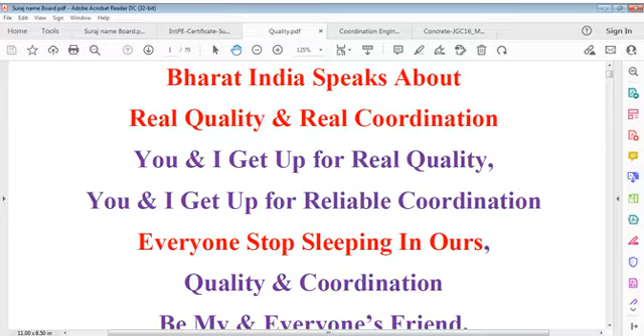It's unfortunate, and not only in ours, I see other countries do the same. There is no major difference, but there is no hunger for quality anywhere. Quality is not made an aim, an objective. It should be made an aim, an objective. I don't know the reason why it's like that, but it happens.

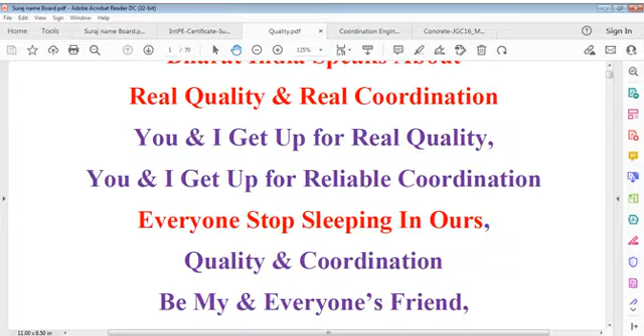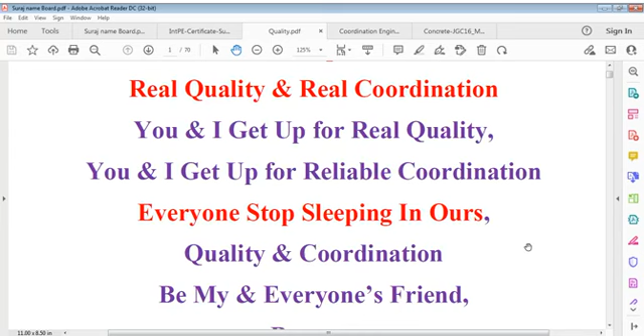When I say quality, I mean the real quality, not just papers, not just statements. Production, manufacturing, construction, all should have quality systems and inbuilt quality. We cannot simply say we got quality only using certain documents. No, the product must give quality, whatever kind of product it may be.

It may be some object, service, governance, management, production, product delivery, maintenance, or individual life. Whatever is least expected, at least that should be given. But unfortunately it doesn't happen. We sleep, and particularly in this modern world full of digitization and money power, people have left behind quality. In fact, quality has not only been left behind, it has been disappearing.

Now I am 68 years old. If I compare my time when I started my career in 1975, and particularly in 1981 when I joined overseas jobs in the Middle East and Gulf, and compare the engineering works I did in Bharat, India with those I did in Iraq or the Gulf, I could actually learn there the practical aspects of engineering construction and engineering itself.

I could learn a lot about quality, though there was no system as such in those days. Quality systems did not exist. No computers existed, only calculators. I think that was a good lesson for engineers and generations like me, when we had to do everything manually from scratch to finishing. Every item was done manually, and that was the greatness of the profession, to learn practically. Time changed, quality lifted itself. But computers entered earlier than quality, that's a fact.

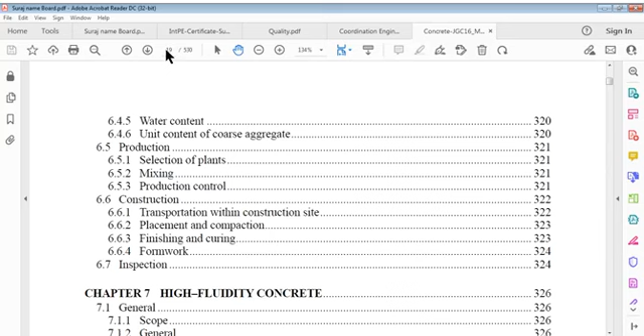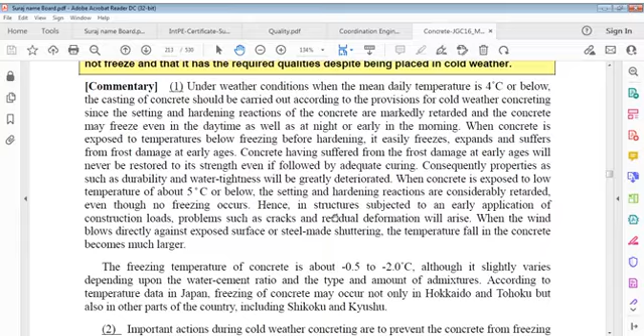It takes time, we have to think on others and on everything like that. Only then we can say we can do something like that. That is a very important point. And just like I'm showing a file of concrete, which is very significant. And we have many references because specifications mean quality itself. The specifications mean quality itself, and we can't say otherwise.

And therefore, I am talking in parallel to concrete because concrete is such a material which is used in abundance in the construction world. Whatever construction we do, whatever development works we carry out, concrete is associated everywhere. Even if you install a machine, you require a certain plinth for the machine, you require a certain foundation.

For major machines, for example a major compressor machine, you have to install it on some plinth, a very big one, or to install some equipment you require some foundation, and that foundation is generally concrete. For buildings, foundations are concrete, structures are concrete. Of course, even if it is structural steel, you require a certain foundation, and that's why we say a machine may finish in 10, 20 or 30 years, but the foundation still exists. Same thing for buildings, they stay for many decades to come.

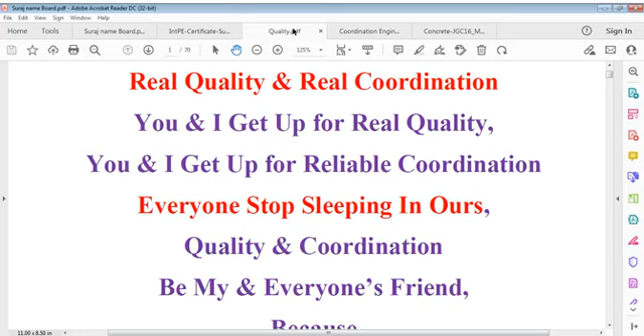We have to differentiate what level of quality we require, and it should perform when wind actions apply, when seismic actions apply, when vibrations apply; all those must be resisted by that foundation. That's the design and quality criteria, and they are considered in conjunction with coordination: engineering coordination, technical coordination, practical coordination. All those must be understood. Each plus and minus point must be known, and that's the coordination engineering I talk of.

I don't have to go further. Just for the purpose of explanation, I am saying reliable coordination. Reliable means it should be workable, it should be safe, it should suit the purpose, and it should be durable. First we say reliable means it should be safe, functional, durable, and it should give every possible result, every possible use which you expect of it, in coordination.

Coordination cannot be put in isolation, it's a part of the job. Without coordination, the job cannot be done, whatever job we do, in engineering or otherwise, even in personal life. Individual coordination is very important, and documentary coordination is very important. If you are in designs, then codal coordination and formula coordination. Likewise, in concrete, material coordination. So much is required for that. We cannot just keep it.

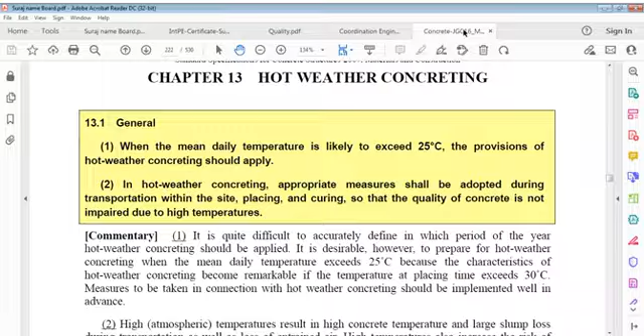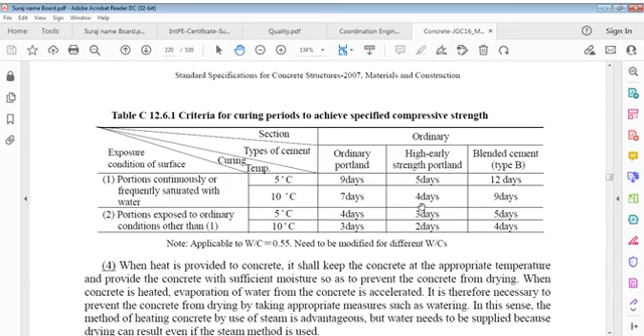We go to concrete now. For example, we are talking here of hot weather concrete. Before that, we talked of cold weather concrete, and the criteria for curing periods to achieve specified compressive strength. We talked of that, and now we are talking of formwork and shoring.

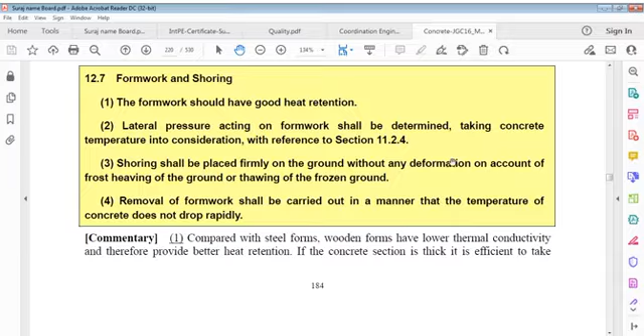Formwork and shoring, you know what formwork is? Formwork is a very simple system which gives support for the concrete to strengthen, for the concrete to set. And shoring is also required. Formwork should have good heat retention. That is the first criterion here: heat retention.

Lateral pressure acting on formwork shall be determined taking concrete temperature into consideration with reference to whatever section. Shoring shall be placed firmly on ground without any deformation on account of frost heaving of ground or thawing of frozen ground. Removal of formwork shall be carried out in a manner that temperature of concrete does not drop rapidly.

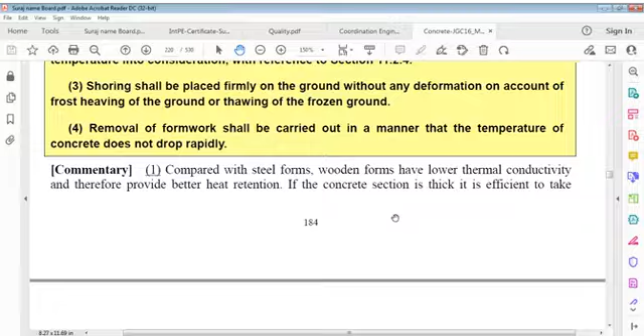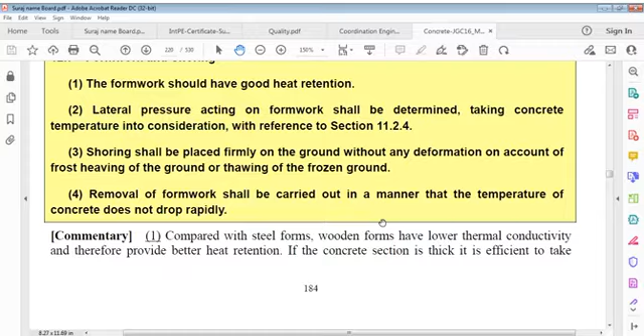So these are very important points here. It means good heat retention, lateral pressure acting on formwork, which we have to determine taking temperature into account, and also shoring be placed firmly on ground without any deformation or settlement, and removal of formwork shall be carried out in a manner the temperature of concrete does not drop rapidly.

Now compared with steel forms, wooden forms have lower thermal conductivity, and therefore provide better heat retention. Here is a comparison. Steel is a good conductor of heat, but wooden formworks are not that good a conductor. Lower thermal conductivity applies to them, and that's why we say heat retention is better in case of wooden formwork, if you use plywood or timber planks.

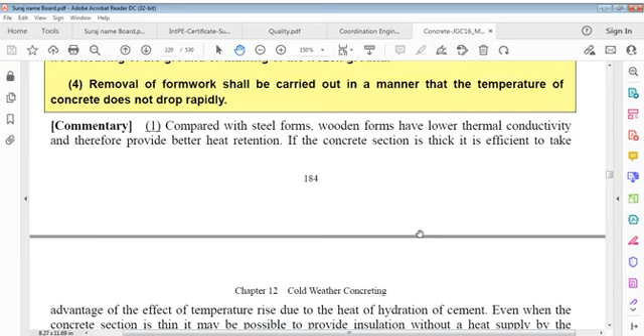If concrete section is thick, it is efficient to take advantage of effect of temperature rise due to heat of hydration of cement when volume is more. Even when concrete section is thin, it may be possible to provide insulation without heat supply by combined use of foamed resin and shuttering. When steel forms are used, it is necessary to pay sufficient attention to insulation since steel is readily influenced by rapid change in ambient air temperature.

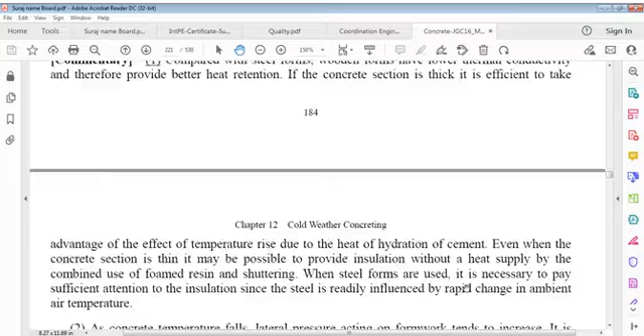This is a very technical point we have to consider in our approach here. This point is very easy to understand. Let me read it again for you so that it's clear. Compared with steel forms, wooden forms have lower thermal conductivity and therefore provide better heat retention.

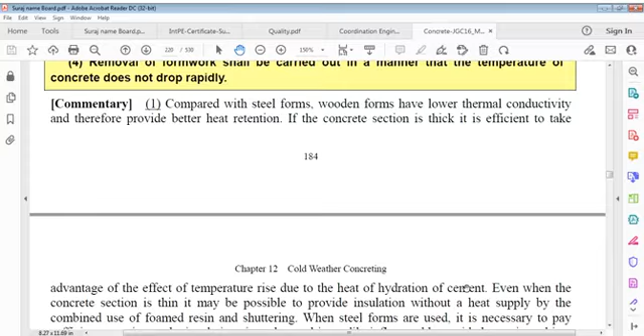If concrete section is thick, it is efficient to take advantage of effect of temperature rise due to heat of hydration of cement. Even when concrete section is thin, it may be possible to provide insulation without a heat supply by combined use of foamed resin and shuttering. When steel forms are used, it is necessary to pay sufficient attention to insulation since steel is readily influenced by rapid change in the ambient air temperature.

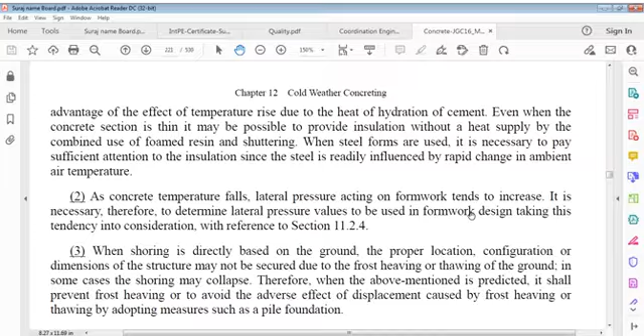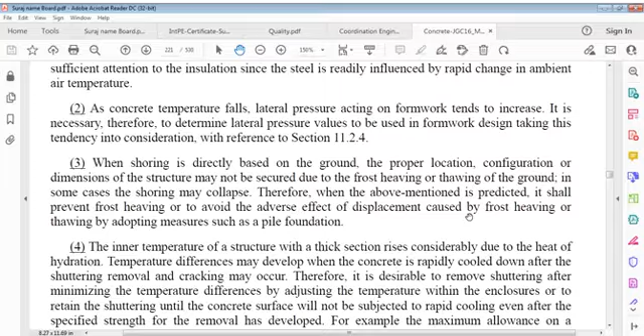As concrete temperature falls, lateral pressure acting on formwork tends to increase. If temperature falls, it means cold, so setting is delayed, and lateral pressure acting on formwork tends to increase. Reason being that when temperature is low, setting is very delayed, and lateral pressure keeps on acting. It is necessary, therefore, to determine lateral pressure values to be used in formwork design, taking this tendency into consideration.

When shoring is directly based on ground, proper location, configuration, and dimensions of structure may not be secured due to frost heaving or thawing of ground. In some cases, shoring may collapse. Therefore, when the above mentioned is predicted, it shall prevent frost heaving or avoid adverse effects of displacement caused by frost heaving or thawing by adopting measures such as pile foundation.

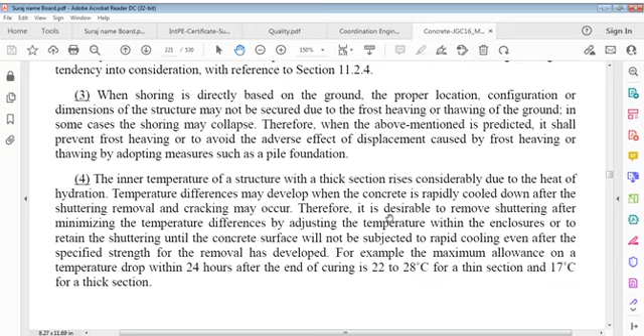Inner temperature of structure with a thick section rises considerably due to heat of hydration. Temperature differences may develop when concrete is rapidly cooled down after shuttering removal, and cracking may occur. Therefore, it's desirable to remove shuttering after minimizing temperature differences by adjusting temperature within enclosures, or to retain shuttering until concrete surface will not be subject to rapid cooling even after specified strength for removal has developed.

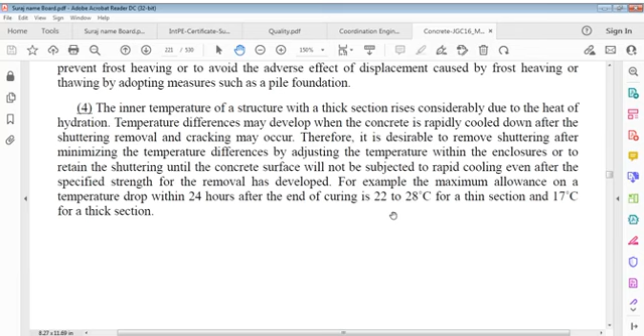For example, maximum allowance on a temperature drop within 24 hours after end of curing is 22 to 28 degrees Celsius for a thin section, 17 for a thick section.

Now we are going to talk about hot weather concrete. It was cold weather, thus in continuation it is hot weather concrete. Hot weather is a very important factor in summer, particularly where temperatures are high, particularly in Gulf countries, in our country, Bharat, India, in many parts of our country, southern parts as well as north, and also many countries where temperature is an issue during daytime as well as

night time, when mean daily temperature is likely to exceed 25 degrees. I am talking of mean daily temperature that is likely to exceed 25 degrees Celsius. Provisions of hot weather concreting should apply.

25 is not, I can say, very wonderful, but let's assume day temperature is 40 and early morning it is more than 24 or something, so it exceeds 25 degrees, even up to 30 in daytime and maybe 15 or 10 in the morning. There is a difference, but likely to exceed 25 means average daily temperature, mean daily temperature, is likely to exceed 25 degrees. We apply hot weather concreting.

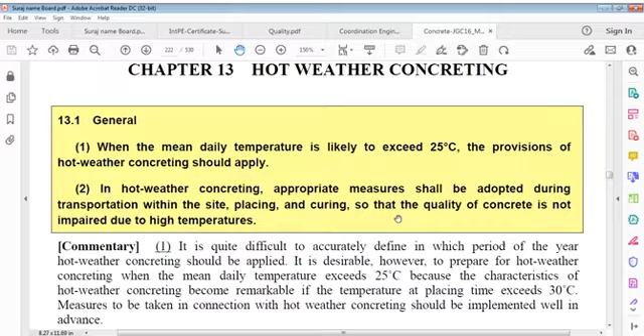In hot weather concreting, appropriate measures shall be adopted during transportation of concrete within site, placing and curing of concrete so that quality of concrete is not impaired due to high temperature. It is quite difficult to accurately define in which period of the year hot weather concreting should be applied. It is desirable, however, to prepare for hot weather concreting when mean daily temperature exceeds 25 degrees Celsius, because characteristics of hot weather concrete become remarkable if temperature at placing time exceeds 30 degrees Celsius.

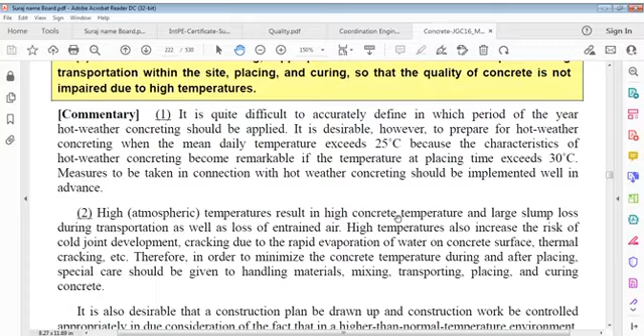We have to consider this when mean temperature exceeds 25 degrees, because characteristics of hot weather concreting become remarkable if temperature at placing time exceeds 30 degrees Celsius. Measures to be taken in connection with hot weather concreting should be implemented well in advance.

High atmospheric temperature results in high concrete temperature and large slump loss during transportation as well as loss of entrained air. High temperatures also increase risk of cold joint development, cracking due to rapid evaporation of water on concrete surface, and thermal cracking. Therefore, in order to minimize concrete temperature during and after placing, special care should be given to handling materials, mixing, transporting, placing, and curing concrete.

Therefore, in order to minimize concrete temperature during and after placing, special care should be given to handling materials, mixing materials, transporting materials, placing and curing of concrete. All this must be cared for in order to minimize concrete temperature.

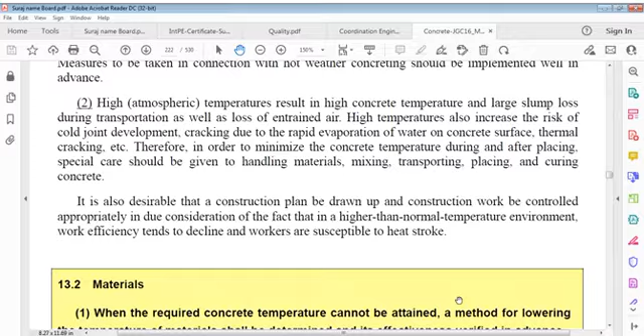It is also desirable that a construction plan be drawn up and construction work be controlled appropriately in due consideration of the fact that in a higher than normal temperature environment work efficiency tends to decline and workers are susceptible to heat stroke. We have to care about workers, we have to care about efficiency of work. And that's a very important point, that it's difficult to do concrete in hot temperature.

Again, I read, it is also desirable that a construction plan, or method statement you can say, be drawn up and construction work be controlled appropriately in due consideration of the fact that in a higher than normal temperature environment, work efficiency tends to decline and workers are susceptible to heat stroke.

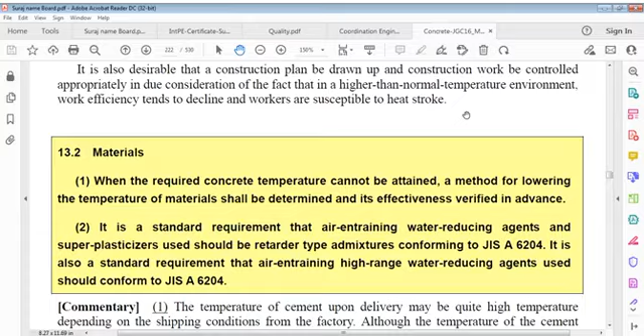Now we talk of materials. When required concrete temperature cannot be attained, a method for lowering temperature of materials shall be determined and its effectiveness verified in advance. It is a standard requirement that air entraining water reducing agents and superplasticizers used should be of retarder type and conform. It is also a standard requirement that air entraining high range water reducing agent used should conform

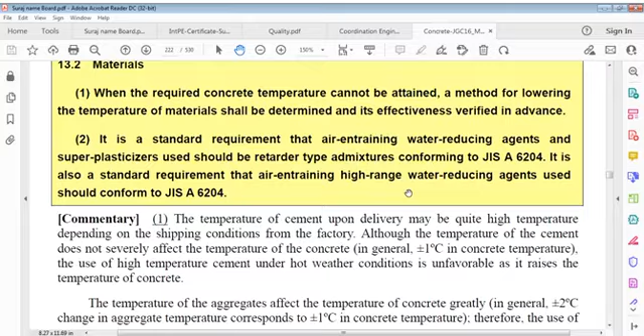to specification. Well, temperature of cement upon delivery may be quite high depending on shipping conditions from the factory. Although temperature of cement does not severely affect temperature of concrete in general, plus minus 1 degree Celsius in concrete temperature.

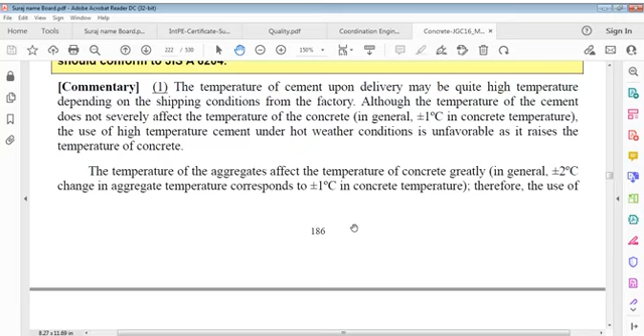Temperature of aggregates affects temperature of concrete greatly. In general, plus minus 2 degrees Celsius change in aggregate temperature corresponds to plus minus 1 degree Celsius in concrete temperature. Therefore, use of aggregates exposed to sunlight for an extended time period may produce a concrete temperature over 40 degrees Celsius. This shall cause an increase in unit water content, an increased rate of slump loss during transporting, and an increased rate of setting after concrete placement.

Thus, aggregates should be kept away from direct sunlight using adequate facilities or kept in an appropriate condition by watering them. In general, the purpose of this method of watering over coarse aggregate is to lower temperature by means of water evaporation. The method can be made even more effective by direct cooling of coarse aggregate by use of cold water. A method of lowering temperature of aggregate by use of liquid nitrogen is used in some cases.

Because of its latent hydraulic property, ground granulated blast furnace slag may consolidate in aggregate storage facilities or storage bins during periods when daily mean temperature is higher than 20 degrees Celsius, thereby making it difficult to remove from storage facilities or storage bins. During such periods, it is important to avoid long-term storage.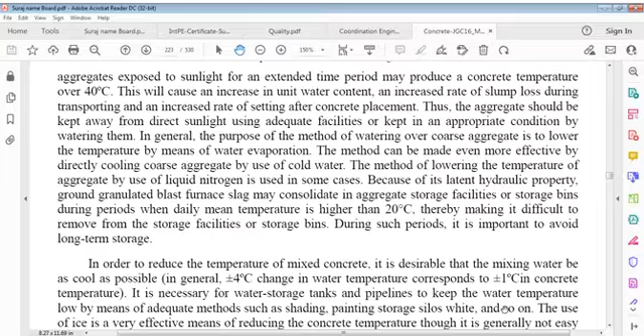So, a method of lowering temperature of aggregate by use of liquid nitrogen is used in some cases. Because of its latent hydraulic property, ground granulated blast furnace slag may consolidate in aggregate storage facilities or storage bins during periods when daily mean temperature is higher than 20 degrees Celsius, thereby making it difficult to remove from storage facilities or storage bins. During such periods, it is important to avoid long-term storage.

In order to reduce temperature of mixed concrete, it is desirable that mixing water be as cool as possible. In general, plus minus 4 degrees Celsius change in water temperature corresponds to plus minus 1 degree Celsius in concrete temperature. It is necessary for water storage tanks and pipelines to keep water temperature low by means of adequate methods such as shading, painting storage silos white, and so on.

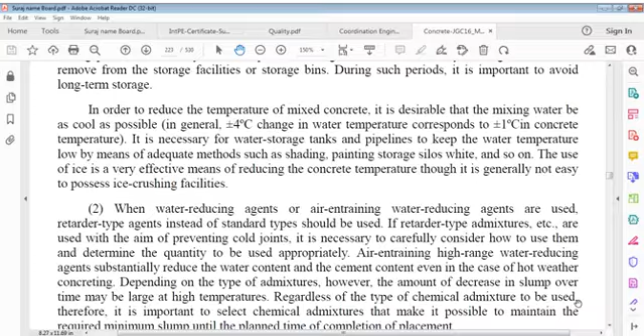Use of ice is a very effective means of reducing concrete temperature, though it is generally not easy to possess ice crushing facilities. When water reducing agents or air entraining water reducing agents are used, retarder type agents instead of standard type should be used. If retarder type admixtures are used with the aim to prevent cold joints, it is necessary to carefully consider how to use them and determine the quantity to be used appropriately.

Air entraining high range water reducing agents substantially reduce water content and cement content even in case of hot weather concreting. Depending on type of admixtures, however, the amount of decrease in slump over time may be large at high temperatures, regardless of type of chemical admixture to be used. Therefore, it is important to select chemical admixtures that make it possible to maintain the required minimum slump until the planned time of completion of placement.

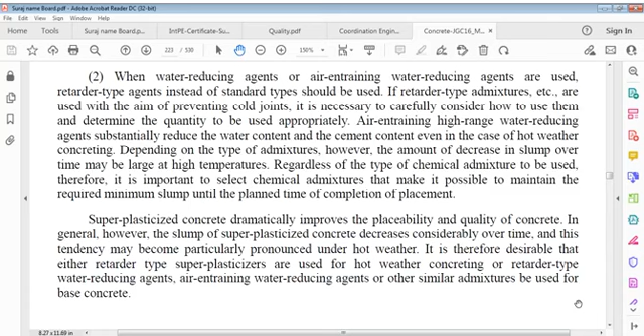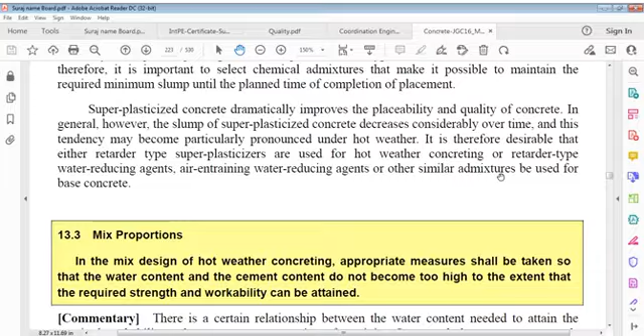Superplasticized concrete dramatically improves placeability and quality of concrete. In general, however, slump of superplasticized concrete decreases considerably over time and this tendency may become particularly pronounced under hot weather. It is therefore desirable that either retarder type superplasticizers are used for hot weather concreting or retarder type water reducing agents, air entraining water reducing agents, or other similar admixtures be used for base concrete.

In mix design of hot weather concreting, appropriate measures shall be taken so that water content and cement content do not become too high, to an extent that required strength and workability can be attained. A relationship exists between water content required to attain required workability and concrete temperature just after mixing. In general, water content tends to increase by 2 to 5% for every 10 degrees Celsius of temperature rise. In many cases, as concrete temperature rises, amount of change in slump and air content also increases.

Consequently, when slump is adjusted by using such methods as adjusting surface moisture content of aggregate without taking control measures associated with hot weather concreting, concrete with higher water content and lower compressive strength than that of low temperature seasons might be placed. When water-cement ratio is kept constant and cement content is increased according to increase in water content with aim of attaining required compressive strength, conditions that are disadvantageous in preventing cracking due to hydration of cement result.

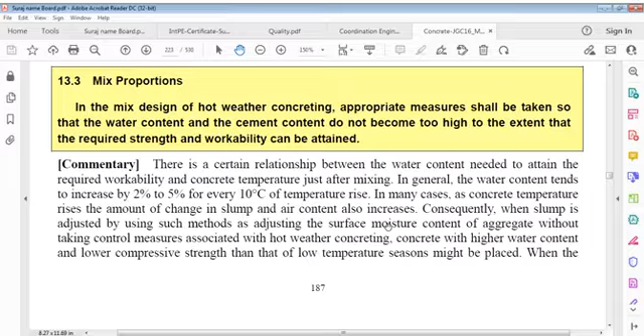It's also very interesting. Let me go back to study it further, and you may also read this mix proportions. And in this case, you can see there's a certain relationship that exists between water content required to attain required workability and concrete temperature just after mixing. In general, water content tends to increase by 2 to 5% for every 10 degrees Celsius of temperature rise.

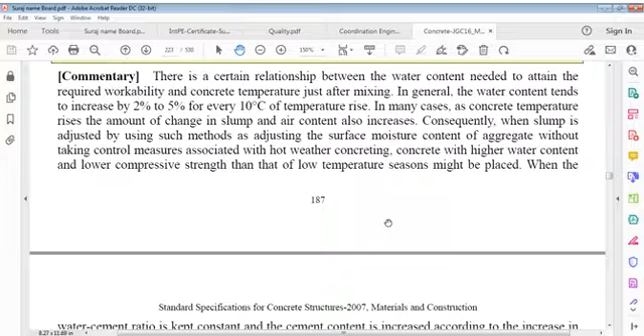In many cases, as concrete temperature rises, amount of change in slump and air content also increases. Consequently, when slump is adjusted by adjusting surface moisture content of aggregate without taking control measures associated with hot weather concreting, concrete with higher water content and lower compressive strength than that of low temperature seasons might be placed. When water-cement ratio is kept constant and cement content is increased according to increase in water content, conditions that are disadvantageous in preventing cracking due to hydration of cement result.

It is necessary, therefore, to take appropriate measures to prevent water content and cement content from becoming excessively high to the extent that required strength and workability can be obtained. To be more specific, it is necessary to determine amount of decrease in slump due to temperature rise and changes in slump over time, and check whether required minimum slump can be attained until completion of placement.

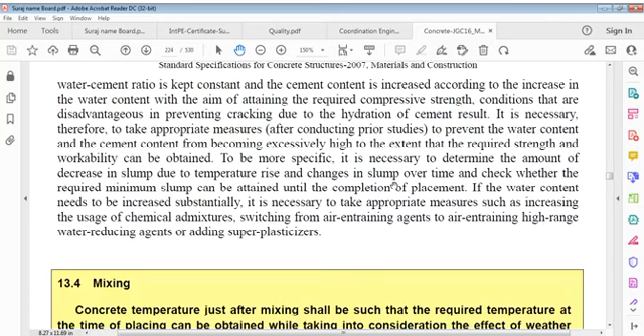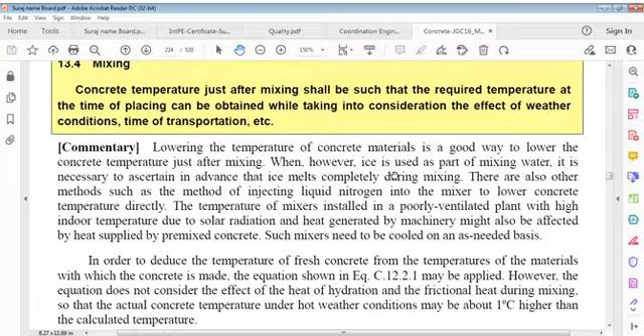If water content requires to be increased substantially, it is necessary to take measures such as increasing uses of chemical admixtures, switching from air entraining agents to air entraining high range water reducing agents, or adding superplasticizers. Concrete temperature just after mixing shall be such that required temperature at time of placing can be obtained while taking into consideration the effect of weather conditions, time of transportation, etc.

Lowering temperature of concrete materials is a good way to lower concrete temperature just after mixing. When, however, ice is used as part of mixing water, it is necessary to ascertain in advance that ice melts completely during mixing. There are also other methods such as injecting liquid nitrogen into the mixer to lower concrete temperature directly.

Temperature of mixers installed in a poorly ventilated plant with high indoor temperature due to solar radiation and heat generated by machinery might also be affected by heat supplied by pre-mixed concrete. Such mixers require to be cooled on an as-needed basis. What it says, there are also other methods such as injecting liquid nitrogen into the mixer to lower concrete temperature directly.

Temperature of mixers installed in a poorly ventilated plant with high indoor temperature due to solar radiation and heat generated by machinery might also be affected by heat supplied by premixed concrete. Such mixers require to be cooled on an as-required basis.

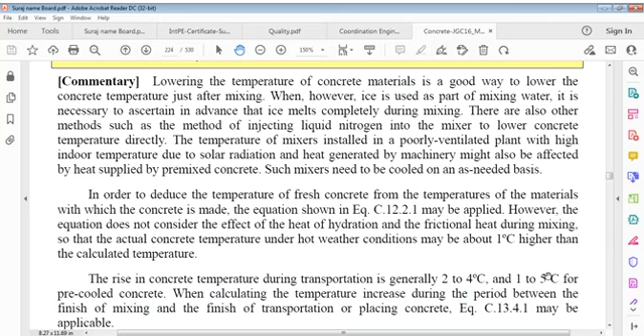In order to deduce temperature of fresh concrete from temperatures of materials with which concrete is made, the equation which we have shown here may be applied. However, the equation doesn't consider the effect of heat of hydration and frictional heat during mixing, so that actual concrete temperature under hot weather conditions may be about 1 degree higher than calculated temperature.

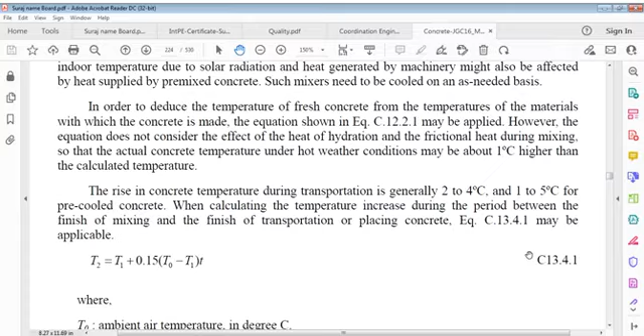Rise in concrete temperature during transportation is generally 2 to 4 degrees Celsius, and 1 to 5 degrees Celsius for pre-cooled concrete. When calculating temperature increase during the period between finish of mixing and finish of transportation and placing concrete, it may be T2 = T1 + 0.15 (T0 − T1) t. This equation we discussed yesterday also.

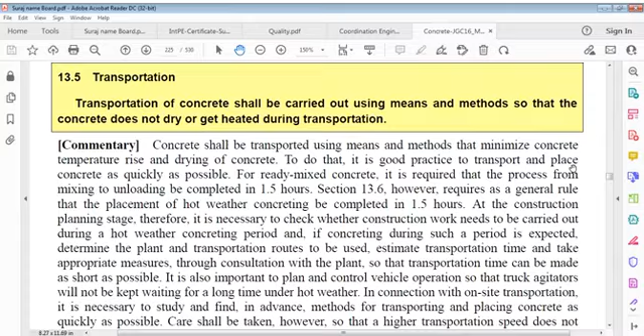Transportation of concrete shall be carried out using means and methods so that concrete does not get dry or get heated during transportation.

I'll be back in a couple of minutes. Meanwhile, you can read this because it's 5:15 and I have to be back in a couple of minutes.

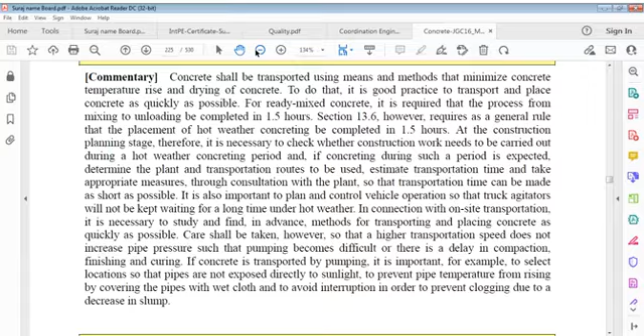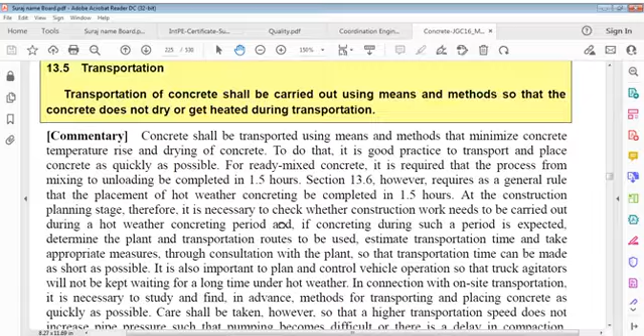Sorry, gentlemen. Now we're talking of transportation of concrete. Transportation of concrete shall be carried out using means and methods so the concrete doesn't dry or get heated during transportation. That's the important point. We don't want to heat it additionally during transportation, and that's a very important point.

Concrete shall be transported using means and methods that minimize concrete temperature rise and drying of concrete. To do that, it is good practice to transport and place concrete as quickly as possible. For ready-mix concrete, it is required that the process from mixing to unloading be completed in 1.5 hours. However, it requires as a general rule that placement of hot weather concrete be completed in 1.5 hours at construction planning stage.

That's why it's necessary to check whether concrete works require to be carried out during a hot weather concrete period, and if concreting during such a period is expected, determine plant and transportation routes to be used. Estimate transportation time and take appropriate measures through consultation with the plant so that transportation time can be made as short as possible. It's also important to plan and control vehicle operation so that truck agitators shall not keep waiting for a long time under hot weather.

In connection with on-site transportation, it is necessary to study and find in advance methods for transporting and placing concrete as quickly as possible. Care shall be taken, however, that a higher transportation speed does not increase pipe pressure such that pumping becomes difficult or there is a delay in compaction.

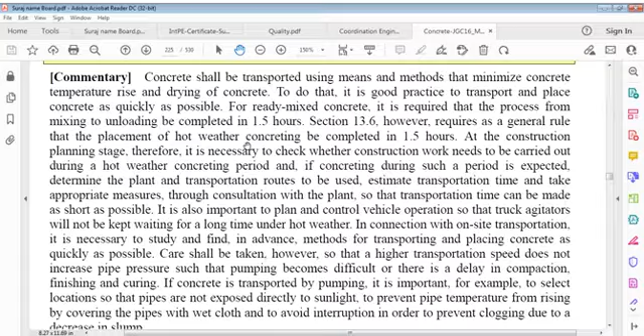That's important. It's necessary to check whether construction work requires to be carried out during a hot weather concrete period, and if concreting during such a period is expected, we have to determine plant and transportation routes, discuss with the plant person and site person, estimate transport time, and take appropriate measures through consultations with the plant so transportation time can be made as short as possible. It's important to plan and control vehicle operations so truck agitators shall not be kept waiting for long in hot weather. In connection with on-site transportation, it is necessary to study and find in advance methods for transporting and placing concrete quickly.

Care shall be taken, however, so that high transportation speed does not increase pipe pressure such that pumping becomes difficult or they cause delay in compaction. If concrete is transported by pump, it is important, for example, to select locations on site so the pipes are not exposed directly to sunlight, to prevent pipe temperature from rising by covering pipes with wet cloth, and to avoid interruption in order to prevent clogging due to slump.

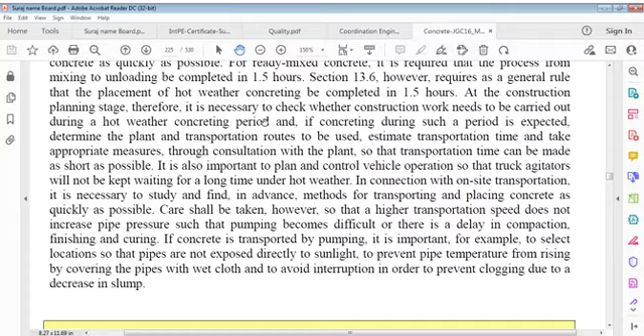Placing. In areas where water absorption is expected, such as on ground or in formwork, areas shall be saturated with water prior to placing, and we generally do it on formwork, wooden formwork.

Areas where water absorption is expected, such as on ground or formwork, shall be saturated with water prior to placing. Furthermore, when temperature of formwork or reinforcement is anticipated to rise substantially due to direct exposure to sunlight, appropriate measures such as water sprinkling or covering shall be taken. Concrete placing shall be completed as promptly as possible, and elapsed time from start of mixing to completion of placing should in general not exceed 1.5 hours.

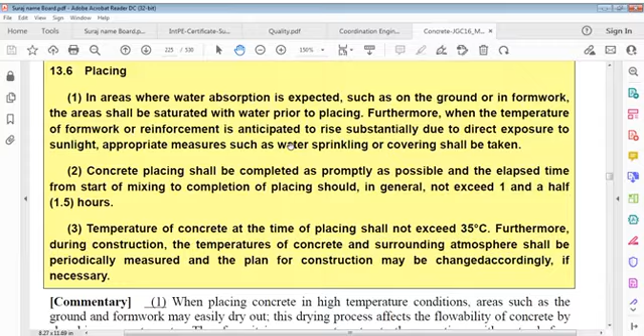Temperature of concrete at time of placing shall not exceed 35 degrees Celsius. Furthermore, during construction, temperature of concrete and surrounding atmosphere shall be periodically measured, and planned construction may be changed accordingly if necessary. When placing concrete in high temperature conditions, areas such as ground and formwork may easily dry out. This drying process affects flowability of concrete by absorbing concrete water. Therefore, it is necessary to saturate these portions with water before placing concrete.

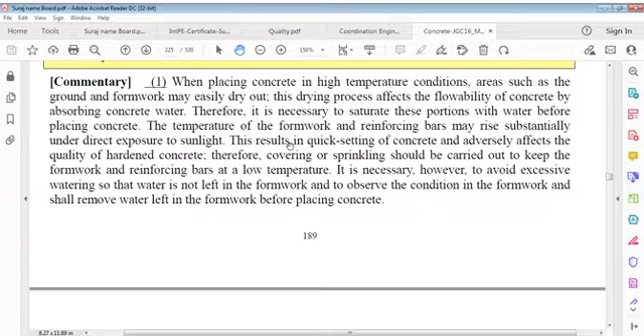Temperature of formwork and reinforcing bars may rise substantially under direct exposure to sun. This results in quick setting of concrete and adversely affects quality of hardened concrete. Therefore, covering or sprinkling should be carried out to keep formwork and reinforcing bars at low temperature. It is necessary, however, to avoid excessive watering so that water is not left in formwork, to observe conditions in formwork, and to remove water left in formwork before placing concrete.

Slump of hot weather concreting is highly susceptible to decrease over time. Consequently, concrete that has been left unplaced after being mixed may become difficult to place. If therefore construction during a period when outdoor air temperature is higher than 25 degrees Celsius is expected, it is important to check on time dependent changeability of concrete in advance so that the required minimum slump for placement defined can be met. In general, amount of decrease in slump is small for 1.5 hours after completion of mixing, and concrete can be placed without any problem during that period.

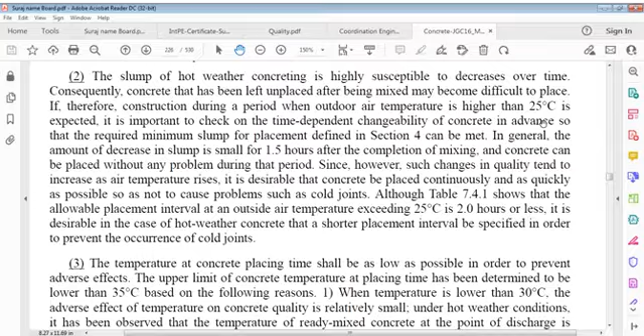Since such changes in quality tend to increase as air temperature rises, it is desirable that concrete be placed continuously and as quickly as possible so as not to cause problems such as cold joints. It shows that allowable placement interval when outside air temperature exceeds 25 degrees Celsius is 2 hours or less. It is desirable in case of hot weather concrete that a shorter placement interval be specified in order to prevent occurrence of cold joints. Temperature of concrete at placing time shall be as low as possible in order to prevent adverse effects.

Upper limit of concrete temperature at placing time has been determined to be lower than 35 degrees Celsius, possibly 32 degrees Celsius, based on various reasons. When temperature is lower than 30 degrees Celsius, adverse effect of temperature on concrete quality is relatively small under hot weather conditions. It has been observed that temperature of ready-mix concrete at point of discharge is between 30 to 33 degrees Celsius, and this temperature rises approximately 2 degrees Celsius during transportation of concrete to site.

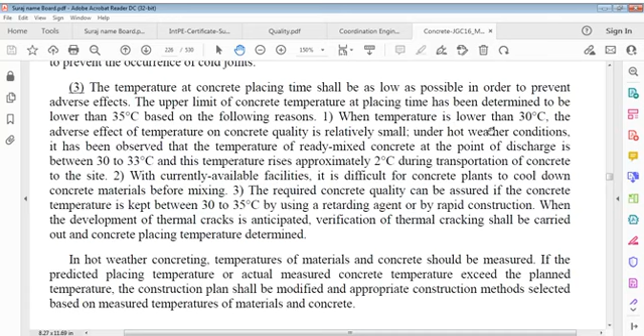With currently available facilities, it is difficult for concrete plants to cool down concrete materials before mixing. Required concrete quality can be assured if concrete temperature is kept between 30 to 35 degrees Celsius by using a retarding agent or by rapid construction. When development of thermal cracks is anticipated, verification of thermal cracking shall be carried out and concrete placing temperature determined.

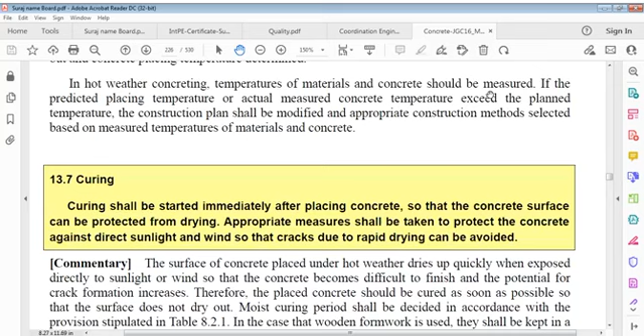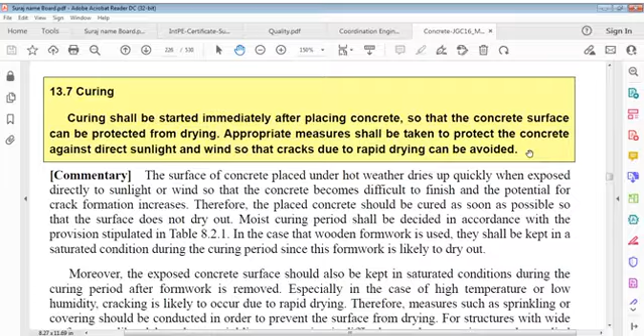In hot weather conditions, temperatures of materials and concrete should be measured. If predicted placing temperature or actual measured concrete temperature exceed planned temperature, construction plan shall be modified and appropriate construction methods selected based on measured temperatures of materials and concrete. Curing shall be started immediately after placing concrete so that concrete surface can be protected from drying. Appropriate measures shall be taken to protect concrete against direct sun and wind so that cracks due to rapid drying can be avoided.

Surface of concrete placed under hot weather dries up quickly when exposed directly to sun or wind, so that concrete becomes difficult to finish and potential for crack formation increases. Therefore, placed concrete should be cured as soon as possible so that the surface does not dry out. Moist curing period shall be decided in accordance with the table.

In case wooden formwork is used, it shall be kept in saturated condition during the curing period since this formwork is likely to dry out. Moreover, exposed concrete surface should also be kept in saturated condition during the curing period after formwork is removed. Especially in case of high temperature or low humidity, cracking is likely to occur due to rapid drying. Therefore, measures such as sprinkling or covering should be conducted in order to prevent the surface from drying.

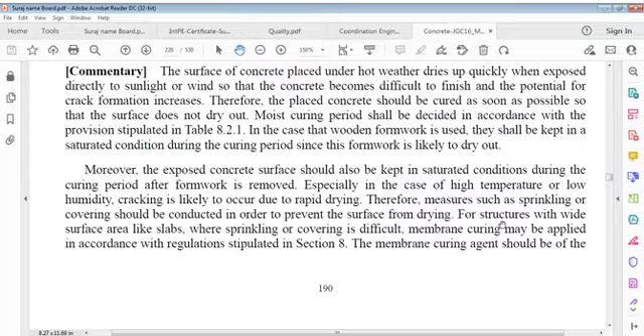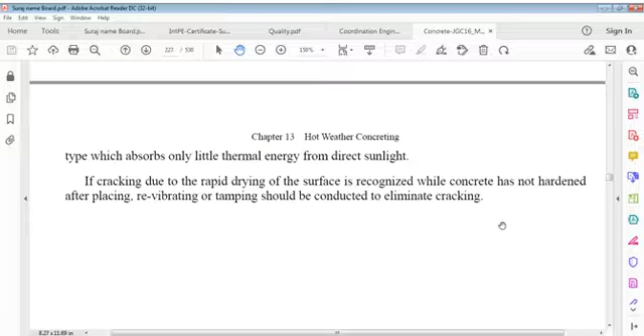For structures with wide surface areas like slabs, where sprinkling or covering is difficult, membrane curing may be applied in accordance with regulations stipulated. Membrane curing agent should be of a type which absorbs only little thermal energy from direct sunlight. If cracking due to rapid drying of surface is recognized while concrete has not hardened after placing, revibrating or tamping should be conducted to eliminate cracking.

Mass concrete. It's different, my dear friends. We are talking of something unusual. We are talking of quality and coordination, and now we are talking of concrete. We have to recognize this fact of quality coordination. Now I'll go a little into mass concrete, but actually it is massive block concrete, to be very frank.

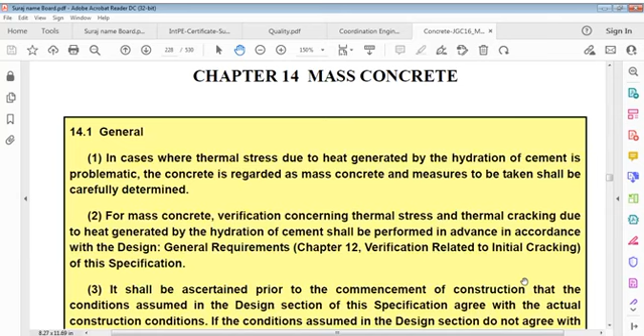In general, in cases where thermal stress due to heat generated by hydration of cement is problematic, concrete is regarded as massive block concrete, and measures to be taken carefully. Mass concrete verification concerning thermal stress and thermal cracking due to heat generated by hydration of cement shall be performed in advance according to designs and general requirements.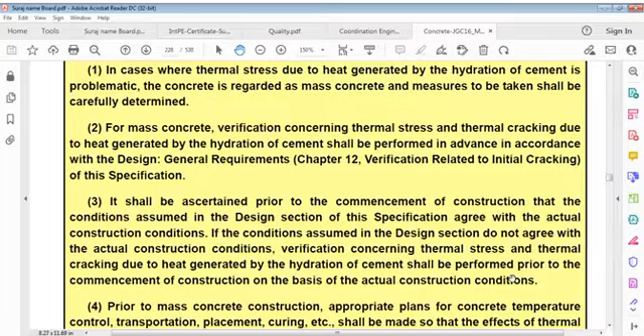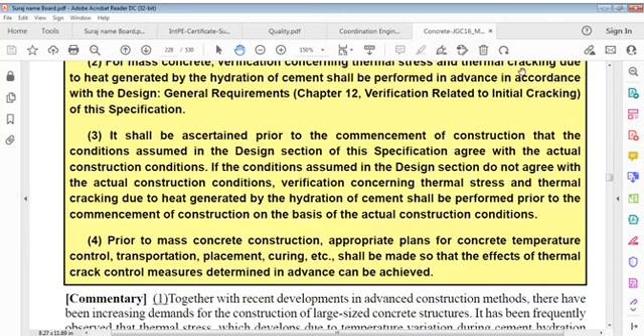It shall be ascertained prior to commencement of construction that conditions assumed in the design section of the specification agree with actual construction conditions. If they do not agree, verification concerning thermal stress and thermal cracking due to heat generated by hydration of cement shall be performed prior to construction on the basis of actual construction conditions. Prior to mass concrete construction, appropriate plans for concrete temperature control, transportation, placement, curing, etc. shall be made so that effects of thermal crack control measures determined in advance can be achieved.

Together with recent developments in advanced construction methods, there have been increasing demands for construction of large sized concrete structures. It has been frequently observed that thermal stress, which develops due to temperature variation during the cement hydration process, causes thermal cracking of large sized concrete structures. These problems were once considered peculiar to concrete dams or concrete structures with especially large sized members. However, harmful cracks are often recognized even in relatively small sized structures, depending on cement materials used and construction conditions.

Therefore, concrete structures which face the above mentioned problem of thermal stress due to heat of hydration shall be dealt with as mass concrete, and consequently special considerations are necessary.

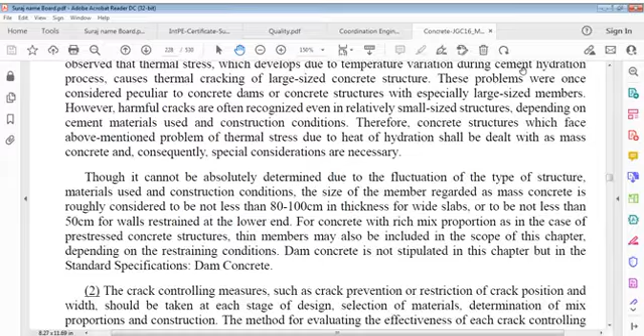Though it cannot be absolutely determined due to fluctuations of type of structure, materials used and construction conditions, size of member regarded as mass concrete is roughly considered to be not less than 80 to 100 centimeters in thickness for wide slabs, or not less than 50 centimeters for walls restrained at the lower end. For concrete with rich mixed proportions, as in case of pre-stressed concrete structures, thin members may also be included in the scope of this chapter.

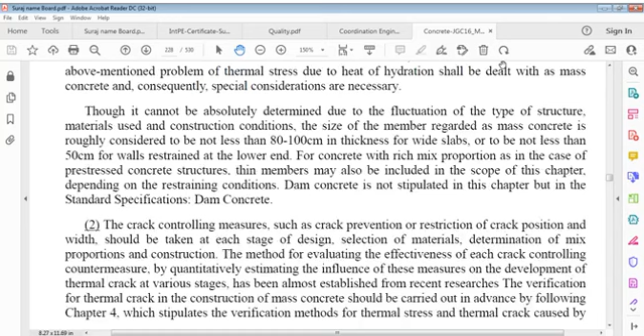Depending on the restraining conditions, dam concrete is not stipulated in this chapter but in the standard specification for dam concrete. Crack controlling measures such as crack prevention or restriction of crack position and width should be taken at each stage of design, selection of materials, determination of mixed proportions and construction. Method for evaluating effectiveness of each crack controlling countermeasure.

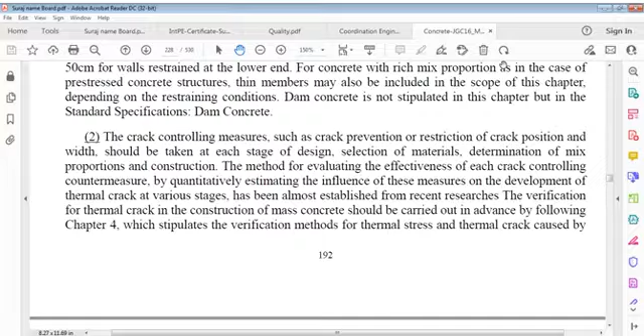It is especially important that all processes of production, supply, transportation and compaction of concrete are controlled completely based on the construction plan. During construction of mass concrete structures, concrete may be delivered from several ready-mix concrete plants. As a general rule, cement and chemical admixtures produced by the same manufacturers, and coarse and fine aggregates produced from the same region, should be used when possible.

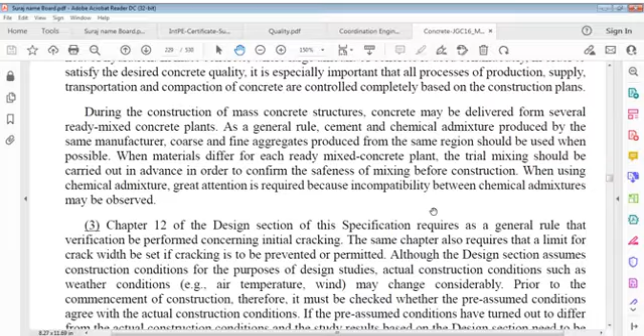When materials differ for each ready-mix concrete plant, trial mixes should be carried out in advance in order to confirm the safeness of mixing before construction. When using chemical admixtures, great attention is required because incompatibility between chemical admixtures may be observed.

The design section of this specification requires as a general rule that verification be performed concerning initial cracking. The same chapter also requires that a limit for crack width be set if cracking is to be prevented or permitted. Although the design section assumes construction conditions for the purpose of design studies, actual construction conditions such as weather conditions, air temperature and wind may change considerably prior to commencement of construction. Therefore, it must be checked whether pre-assumed conditions agree with actual construction conditions.

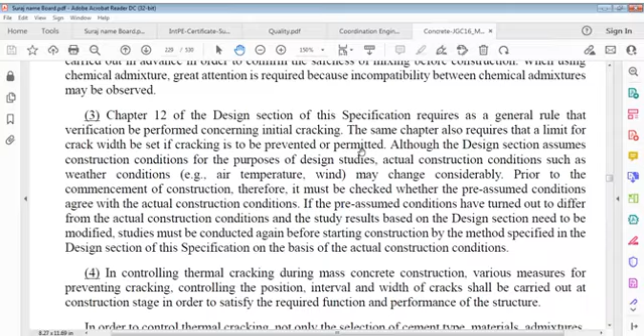If pre-assumed conditions have turned out to differ from actual construction conditions and study results based on the design section are required to be modified, the studies must be conducted again before starting construction by the method specified in the design section of this specification on the basis of actual construction conditions.

In controlling thermal cracking during mass concrete construction, various measures for preventing cracking and controlling the position, interval and width of cracks shall be carried out at the construction stage in order to satisfy the required function and performance of the structure.

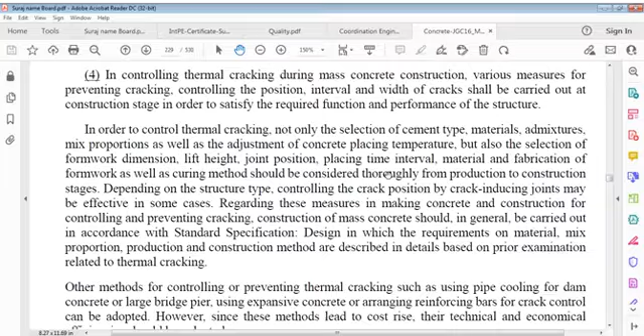In order to control thermal cracking, not only selection of cement type, materials and mix proportions, as well as adjustment of concrete placing temperature, but also selection of formwork dimension, lift height, joint position, placing time, interval, material and fabrication of formwork, as well as curing method, should be considered thoroughly from production to construction stages. Depending on structure type, controlling crack position by crack-inducing joints may be effective in some cases.

Regarding these measures in making concrete and construction for controlling and preventing cracking, construction of mass concrete should in general be carried out in accordance with specifications and design in which requirements on materials, mix proportions, production and construction methods are prescribed in detail based on prior examination related to thermal cracking.

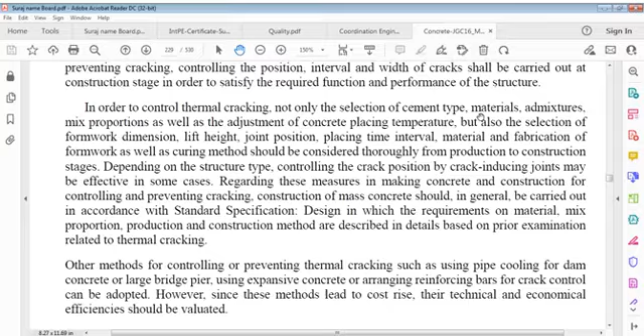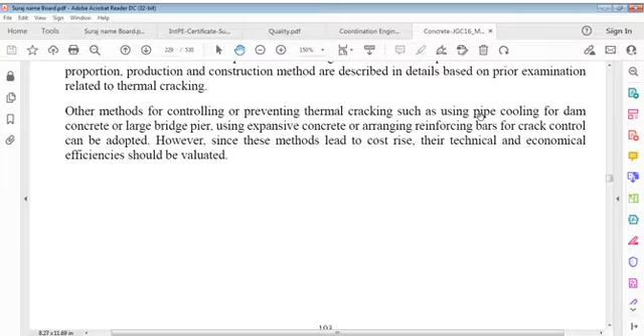Other methods for controlling or preventing thermal cracking, such as using pipe cooling for dam concrete or large bridge piers, using expansive concrete, or arranging reinforcing bars for crack control, can be adopted. However, since these methods lead to a cost rise, the technical and economical efficiencies should be evaluated.

As a general rule, cement and admixtures used in mass concrete should be the ones specified in the design. If cement or admixtures other than those mentioned are to be used, verification concerning thermal stresses and thermal cracks due to heat generated by hydration of cement shall be performed.

We'll take up the remaining one. I think it's concrete, and we have to be very careful about how to use it; it's a very important talk, and we should think again and again on these points, and only then we can reach somewhere. That's the important point we have to consider. Now I'm going to close this talk for the time being because we have to take care of something now. I'll do it again.

We will repeat something here from this point of view, as this concrete is a very important one for everyone. It's not just simply what we think. It's something that should be taken care of correctly, and that's the point we have to consider in our approach. Now you can say, because it is concrete, I don't want to just run; I want to understand also. You should understand clearly what it is, how it is done, and how it is not done.

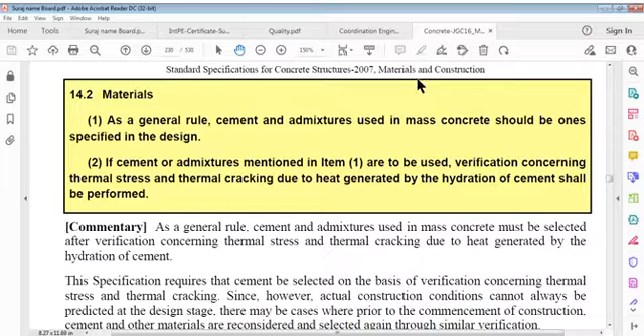So from that viewpoint, we may say, okay, what we understand in coordination engineering, and also here in quality engineering, we understand this, and all that we have to know to understand all this, we will take now. Okay.